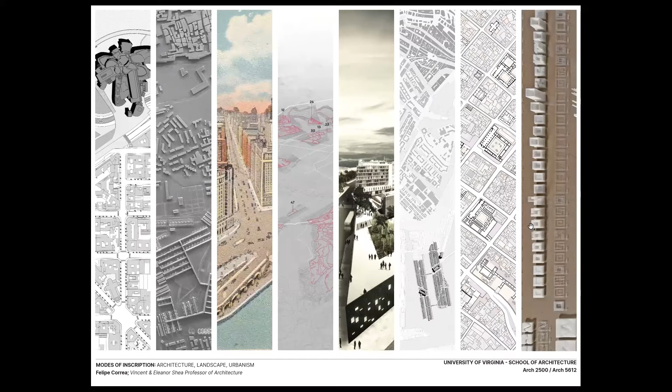Topical in structure, this lecture course presents a contemporary examination of the role of the designer within the built environment, beyond the disciplinary silos inherited from the 20th century that defined the practices of architecture, landscape architecture, and urban planning as autonomous disciplines with limited transversal dialogue.

If the post-war era left us with a collection of siloed and autonomous disciplines, where the architect was conceived as primarily the author of buildings, the landscape architect as the author of open spaces, the urbanist as the manager of public works, and the engineer as the builder of infrastructure.

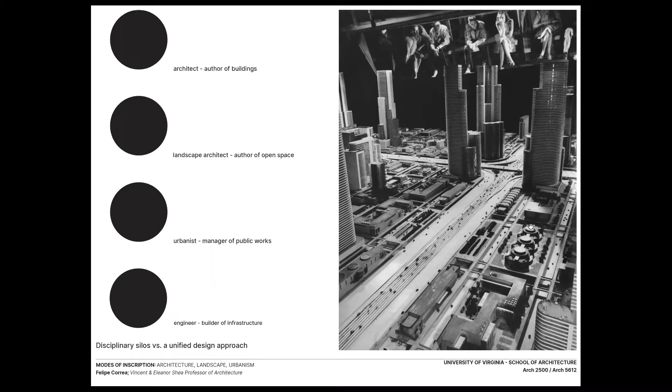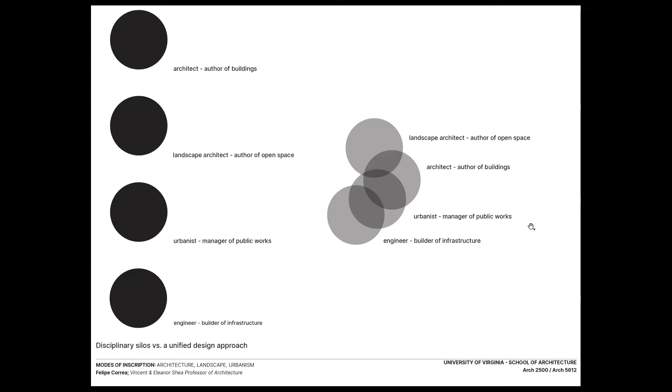Today, we are beginning to see a clear overlap among these disciplines. This does not mean that the architect is doing the work of the engineer, or that the landscape architect is doing the work of the architect, but it does mean that there is a common ground, a new form of dialogue that allows the design disciplines to engage projects of greater scale and complexity.

In this context, the course argues for a more unified disciplinary body, one that can expand the toolkit of the designer by finding overlaps and affinities within the methods and techniques present across all these disciplines. By looking at a carefully curated selection of projects from concept to implementation, this course will present a body of work that bridges across architecture, landscape architecture, and city planning.

Ranging in scale from individual buildings to territorial strategies, the course will argue that meaningful design actions and their multiple modes of inscribing the Earth's surface have a major transformative role in shaping cities and open territories across a wide variety of scales. Key to this argument is the claim that a renewed understanding of the notion of urban design as a bridge practice is today more important than ever.

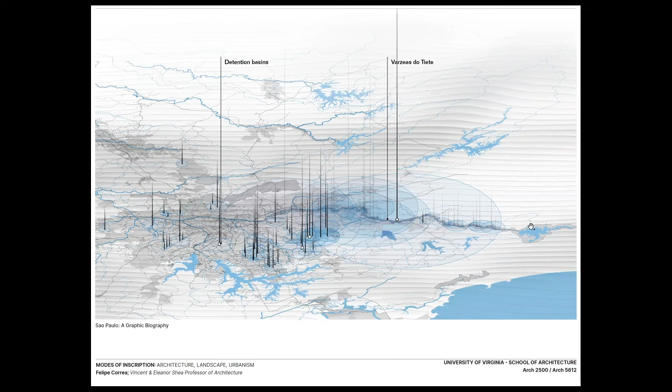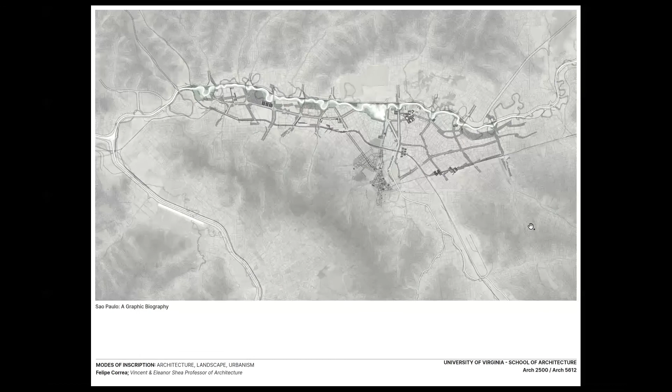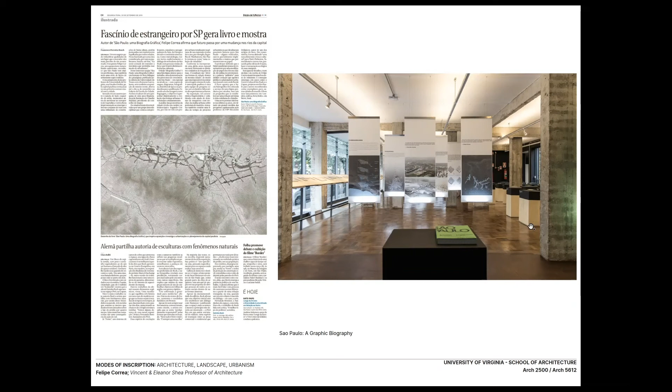If in its initial conception, urban design was tasked with linking architecture and urban planning, today urban design must expand its canvas of action in order to better establish elective affinities across disciplines and urban contexts. Affinities that can make urban design the glue that, on the one hand, ties together the fragmented specializations inherited from the mid-20th century, and on the other hand, serves as the link between design and broader planning and managerial processes, opening important dialogues between design, planning, and governance.

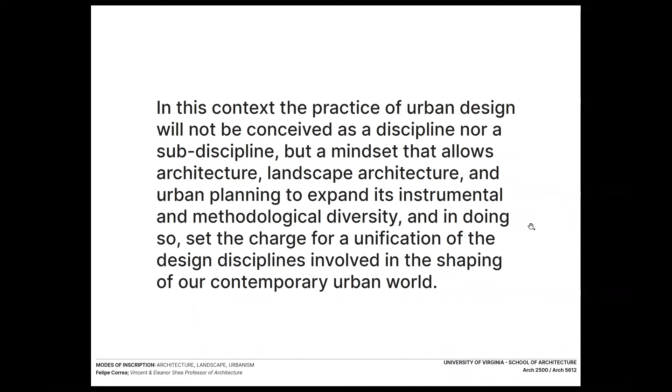In this context, the practice of urban design will not be conceived as a discipline nor a subdiscipline, but a mindset that allows architects, landscape architects, and planners to expand their instrumental and methodological diversity, and in doing so, set the charge for a unification of the design disciplines involved in the shaping of our contemporary urban world.

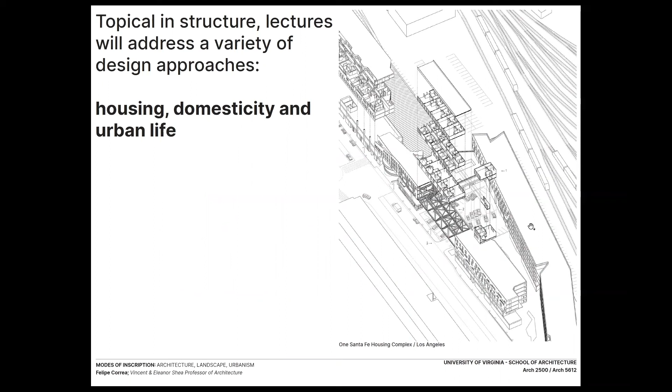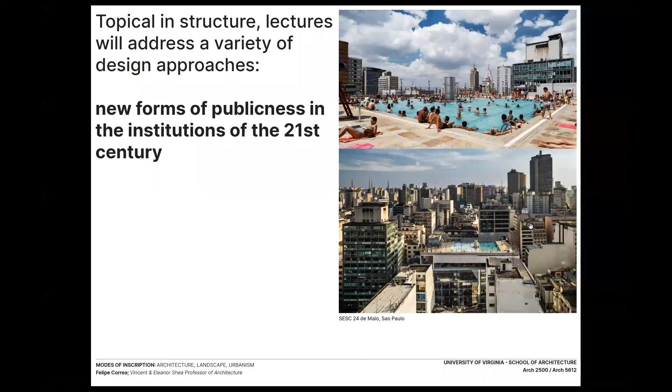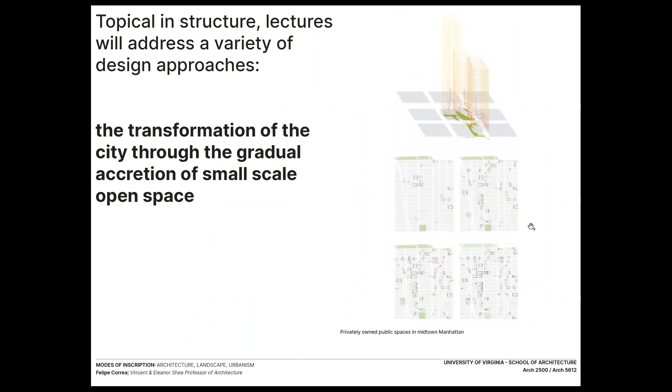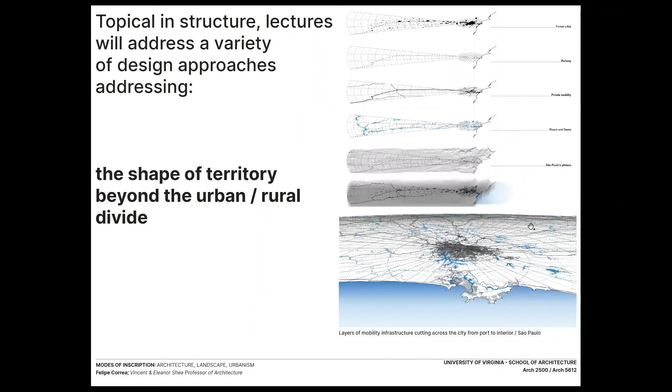Topical in structure, the lectures will address a variety of design approaches, including housing, domesticity, and urban life; new forms of publicness in the institutions of the 21st century; the adaptation of mobility networks to the 21st century city; the transformation of the city through the gradual accretion of small-scale open space; large urban landscapes and the reincorporation of post-industrial land into the life of the city; the shape of territory beyond the urban-rural divide, among many other topics.